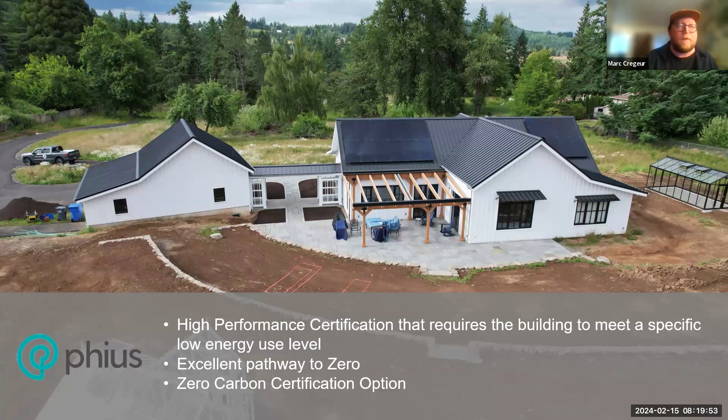So, what's the value? Why do we want to do zero energy or zero energy ready homes? Well, number one is comfort. Sure, can there be an uncomfortable zero energy house out there? Absolutely. You can throw solar panels on anything and make it zero energy. But if you're following the steps that we're going to lay out here pretty soon in this webinar, with good building science practices, it's going to reduce that energy use and make more comfortable buildings for your occupants by following these types of principles that we'll lay out.

Health: this could be the indoor air quality health of your occupants, and health of the environment around us. We start to introduce filtered ventilation. We start taking bad materials, toxins out of the house. We're going to have better indoor air quality, moisture control, definitely a big part of that. And then we also want to look at, what are we doing for the environment around us?

40% of all the US carbon emissions come from buildings. Reducing our energy consumption and fueling it with renewable resources is going to help reduce the effects of climate change. We're moving forward with codes and goals that we want to meet out there. Getting zero energy ready homes is a really great step. Getting zero energy homes is a step that we want to get to eventually.

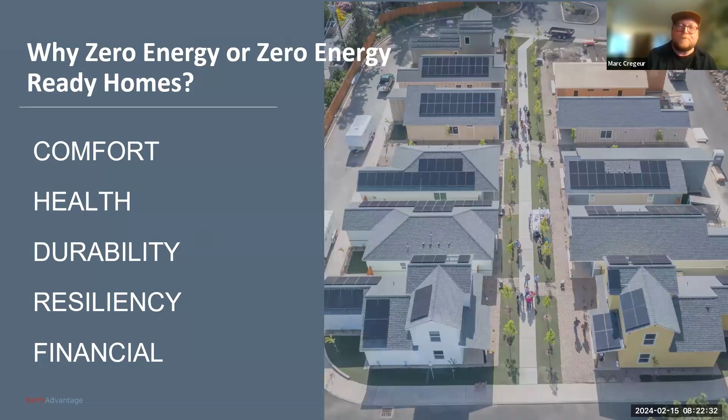And then, financial: we want to protect ourselves from these rising energy costs. It's only getting more and more expensive out there. And so when we go zero energy, we are really protecting ourselves from those rising costs. And all these systems have their simple payback. They will pay for themselves down the road. And as these energy costs rise, that simple payback gets smaller and smaller. So there's a great financial reason to move into these types of homes, with lowering operating costs and protecting on rising energy costs.

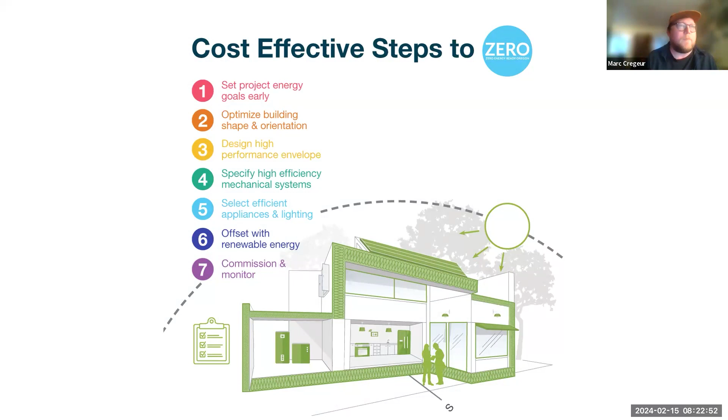So how do we do it? Our friends at the Zero Coalition put together these really great 7 cost-effective steps to zero energy buildings or zero energy ready buildings that we're going to follow and use as a jumping off point for this webinar. And that first step is going to be: set your project energy goals early. Maybe arguably the most important step out there is start doing this at design. Make a decision, get together with your project team, and lay out the goals that you want to have for this particular project. That's going to be a really great way to plan and design and reduce costs and issues down the road with trying to make it happen mid-construction.

Get together with your project team, get together with an energy efficiency consultant, get some energy modeling going, get early design assistance or an IDP, integrated design process, whatever you want to call it. But start doing this early in the design phase, get those goals set, get those people set, and then once we start designing, we're doing that with these goals in mind.

One of the first things we really want to look at is optimizing our building shape and orientation. Low surface to volume ratios and simplified design are going to ease construction costs. It's going to make the house much more energy efficient.

It's going to be a lot cheaper to construct. And that is a really, really great first step. With design, we're looking at those low surface to volume ratios. We want to be looking at how we orientate our house. Obviously, we want that east-west orientation, good southern exposure, great roof lines and pitches, simple designs, so we can really get planned for our solar in the future.

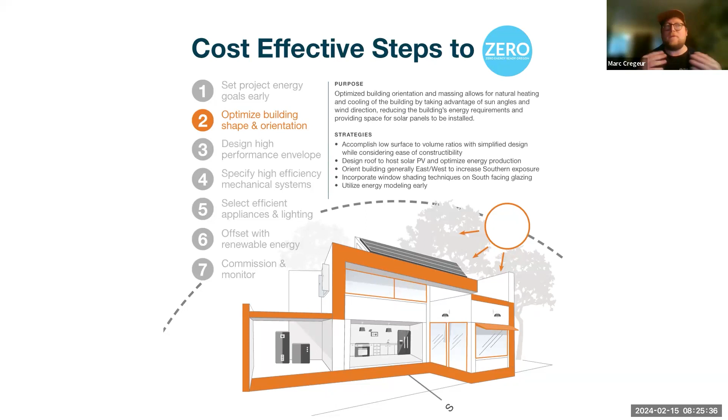cooling loads. We want to look at maybe our solar heat gain coefficients and where we're putting those in certain windows and certain orientations. All these things can be built and thought about in our design phase, making sure that we're getting those into plans, and start utilizing energy modeling as soon as you can while you're designing. Ideally, maybe you have someone on staff that's a WUFI modeler or a certified passive house consultant, and you can start doing it through that. But if you don't, start looking at working with a HERS Rater and Energy Rater right away. Get some energy modeling done as you're designing.

Like, what about this wall system versus that wall system? And we're doing a cost benefit analysis on there. A lot of value engineering going on. What about this mechanical system, ducted versus ductless, or this HSPF versus that HSPF? What if we do this or that? Start working with this value engineering and all your cost benefit analysis of these different things and these different assemblies that might work for your building or for your clients. The earlier you start doing this, the better your decision making will be, and the more money you can save down the road.

Not only that, these HERS raters, they're building science experts. They live, eat, and breathe this stuff every single day. And so when we're talking in the design phase and making these kinds of decisions, we can think about how is this going to affect this other thing in the house? How does this work as a house, as a system? They can bring some of these building science concepts into your practice and into your construction.

If we want to work with any of the certifications we talked about earlier, and those aren't all of them, those are just some of them in our market and some national ones. Maybe there are different ones in your area, wherever you're at. But normally when we're working with certifications or programs or energy ratings, those are going to be shepherded through your HERS rater. So they're going to be able to let you know what all the requirements are right away, get ahead of that, and make sure we're planning for all that and getting it into our plans, so we can execute correctly when we're actually out there constructing.

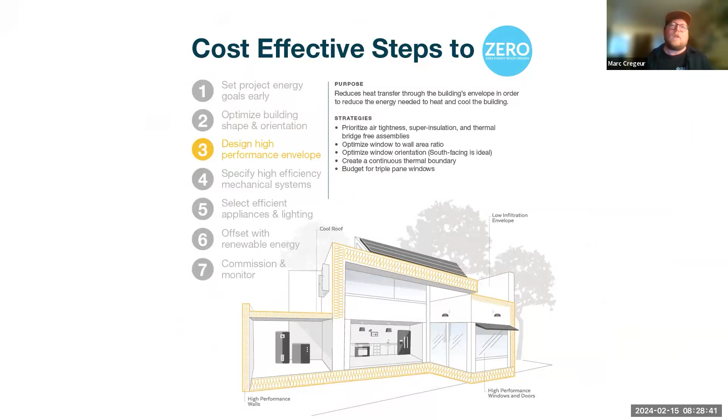All right, next one: design a high performance envelope. Yeah, this is really, really huge. This is the shell of your building. This is the thing that's going to last. So you want to create a really nice high performance shell. And when we're talking about that, we want to talk about our control layers, right? Lstiburek would say something about that, about the perfect wall, and it's absolutely true. We want to talk about our bulk water control layer, keeping all of our bulk water off of our assemblies.

So that's gonna be done through a really nice tightened up WRB. Maybe we have rain screens and then ventilation going there. Maybe we have some extended eaves happening to keep all that rainwater and bulk water off of our assemblies there. Always the number one moisture control, number one important thing in a building.

Next, we're talking about our air barrier. I'm telling you right now, this is going to be the most cost-effective, low-hanging fruit out there to reduce that energy load, reduce that consumption, and create more comfortable buildings. So I highly suggest you look at it and invest in your air sealing and your air barrier techniques. And there's a couple of different ways we can go about this.

Maybe you're still using a primary air barrier strategy where that drywall is going to be your air barrier, and you're going with some air sealing techniques with rattle can foam and caulking and seal, and using a really good checklist, and you can have really good success with that. I have seen that. I have seen very tight houses being done with a rattle can foam and a really good checklist if it's executed really well.

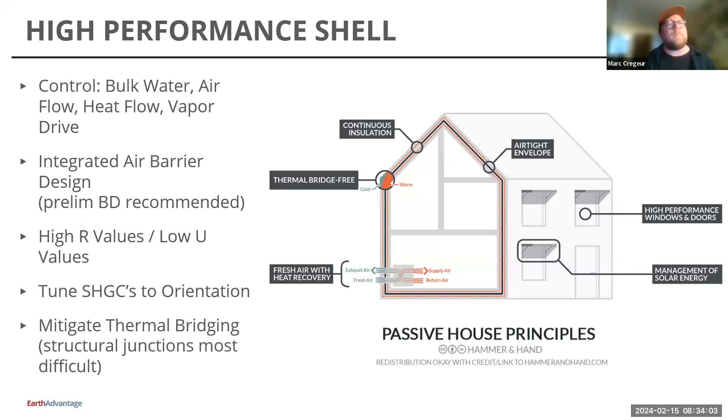Next step is specify high efficiency mechanical systems. Yeah, absolutely. We want to install high efficiency heat pumps. That could be a ducted system, but we want to make sure that we are designing the system and sizing it correctly to that specific house.

You need to go out there, and whether it's your HVAC contractor or maybe you're using a third party designer, here at Earth Advantage, we do third party HVAC design all the time. And we want to make sure that we are designing and doing our Manual J and D calculations for your particular house with your particular envelope specs. So we can make sure we're not oversizing or undersizing, but right sizing this equipment.

And so, yeah, really important, bring them inside, get these things sealed really good, lower that leakage, install them as they were designed. We want to make sure our design flows in our rooms are our actual flows. And then we want to be testing to make sure that happens. So commissioning our systems is a really important part of this process. So make sure we are designing, installing, and then commissioning our systems correctly.

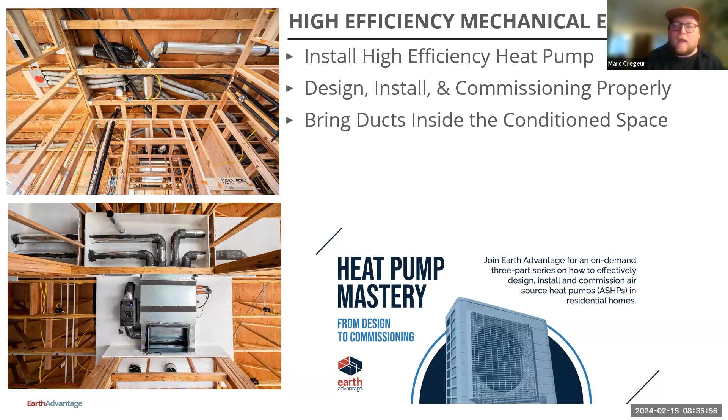Next step is that we want to introduce our balanced ventilation with heat recovery. Balanced ventilation is now code in Oregon. Heat recovery isn't quite there, but I highly suggest that. I know we're looking at some costs here, but there's some different steps that you could do. Maybe your building lends itself to just a spot ERV or something, bringing balanced ventilation in with a little bit of heat recovery in a low cost scenario. Maybe you're building an ADU or a really small building and that works.

Or maybe you take the next step up where you're bringing an HRV in, but maybe you're just doing a couple supplies and a couple returns and lowering the cost of that, but still getting some balanced ventilation and heat recovery in there. Or maybe you're going to the full Cadillac system, a full distribution, getting all our supplies in our bedrooms and our returns and exhausts in our bathrooms or hallways, and doing this full distributed system, which is incredible and great. And I think we're seeing more and more of that.

But what's going to work for your project? Do some energy modeling, do some cost benefit analysis. But I highly suggest we move to heat recovery when we're working with these type of buildings.

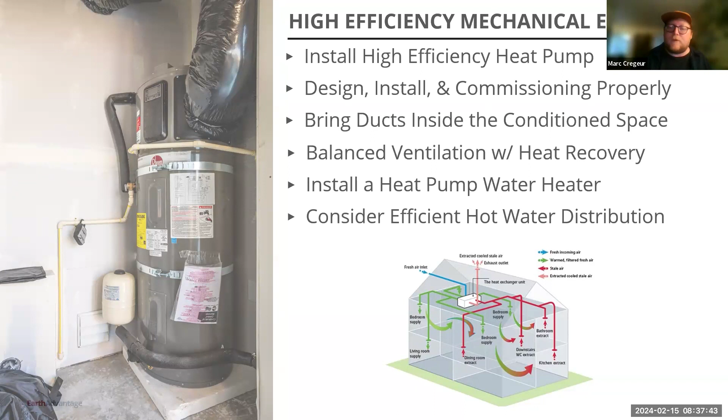Installing a heat pump water heater. These things are incredibly efficient. A regular standard electric tank is going to be 95% efficient. These things are 350% efficient and becoming more cost effective. So look at that product. We want to reduce our loads, and not just reduce the energy use of heating up the water, but we want to consider efficient hot water distribution, which is going to be a requirement in some programs out there, of how we distribute the water around the house. So definitely some things to think about there.

Next, select efficient appliances and lighting, kind of a no-brainer and very simple. LED lighting out there is cheap, it's effective, and it's everywhere. So putting in LED lighting everywhere, but maybe we want to look at daylight lighting modeling, and maybe we don't need as many indoor lights if we have good daylighting. Maybe we want to look at some smart controls, motion sensors, occupancy sensors, dimmer switches or something like that that can be reducing the energy of that building.

Install all of our Energy Star appliances. It's going to be a requirement if you're working in that DOE program, or here Earth Advantage or Energy Star or some of these other programs are requiring all Energy Star appliances. They're everywhere. Make sure we're putting those in. And so those are kind of a no-brainer, really simple step to reduce some energy there.

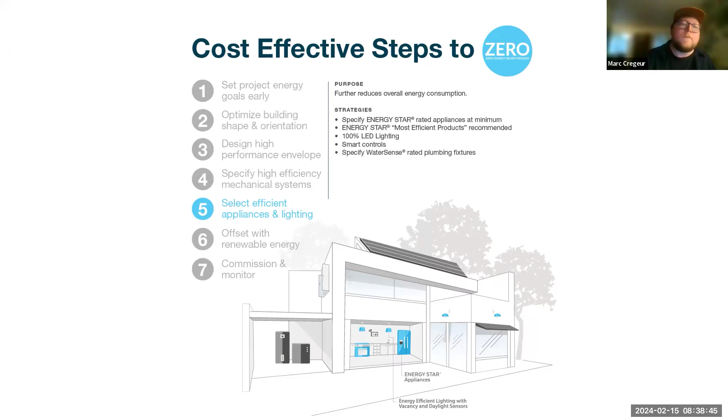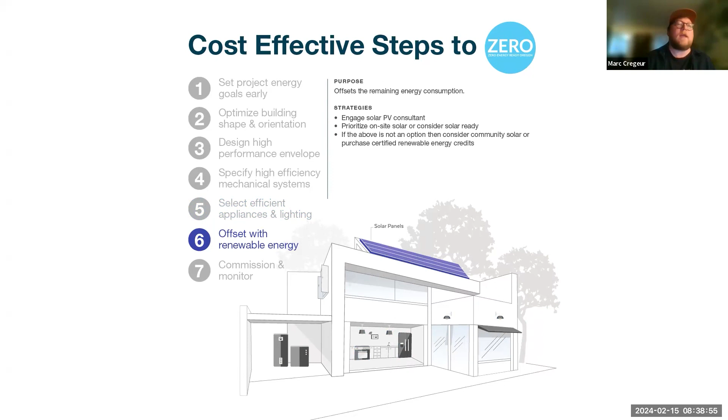And next, when we hit all these steps, we got together a plan and we designed our house nice and we orientated it well, and we built a really nice high performance shell and executed that well, and it's really tight, and we put in high efficiency equipment and it's designed well and it's installed well, and we got our lighting and our appliances, and we got all these pieces of the puzzle built up to put in.

And then we can start looking at a renewable system, right? We want to reduce the consumption of that house, reduce that load so we can put a smaller system on, right? Solar's getting cheaper, but it's still pretty expensive. So the smaller the system, the better. So at the end, we want to reduce that consumption, and then we can size that solar system to that and install that.

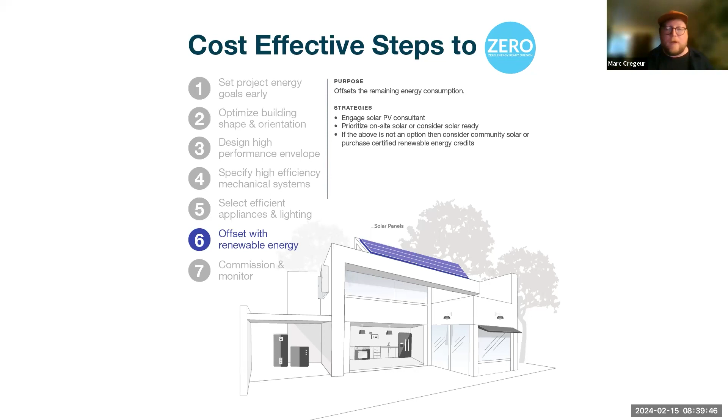So we need to have that space in the breaker, have that ready for future solar. We need to have space on the walls for future inverters. We want to make sure we have a 3/4 inch, or maybe even a 1 inch, depending on the size of your house, non-flexible metal conduit, going from our J box at the wall near that breaker all the way to the J box up at the roof, making sure our future solar contractors have conduit to be able to run their lines down and hook up those inverters.

We want to make sure that obviously we're orientating and creating really good, simple roof designs that allow for solar. But we also want to make sure that we are watching where our penetrations are going through our roof, whether it be roof vents or plumbing penetrations, flues, different things like that, so that we're not putting them into the spot where we want to have solar. So really, really important. I can't stress this enough.

Get it into the plans, put out where those solar panels are going to be and get those into the plans. And if you know where penetrations are going to be, get those into plans. So we're able to execute on site when we're constructing this home, and make sure things are ready out there for future solar, and we're getting these things solar ready.

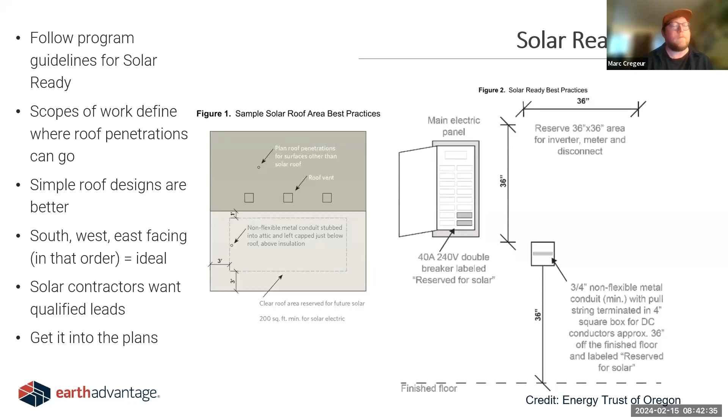And another last step out here is commissioning and monitoring, right? We want to make sure the house is performing the way we designed and constructed it. We want to do blower door tests. We want to test all these ventilation systems, whether it's your whole house ventilation system or your spot ventilation system. You would be surprised how many houses I walk into and none of their bath fans, you can hear them, but they're not sucking anything out.

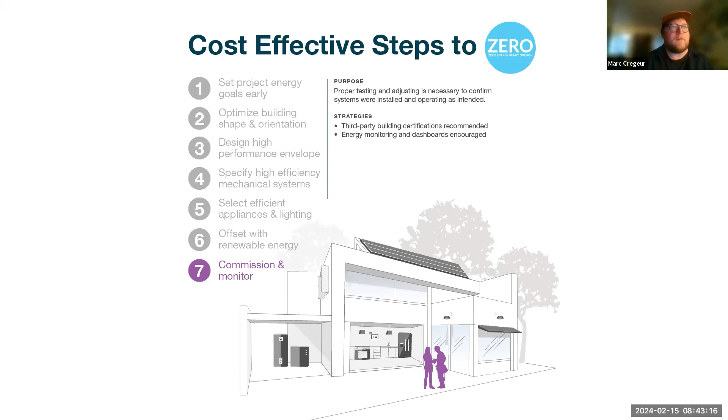This is another value of hiring a third party rater or HERS rater to come out and do commissioning on all these works. Work with these programs out here. Any of these certification programs are great. You're going to have a rater come out there as a third party looking over your building. They're going to be looking over your subs and making sure things are installed the way you want them to be installed, and making sure that they're working the way you want them to work.

Not only is it going to verify and make sure all this is working, but these programs are great sales tools. And some of them have good money attached to them. I'd be remiss if I didn't talk a little bit about, as we mentioned before, this new 45L energy efficient new construction tax credit.

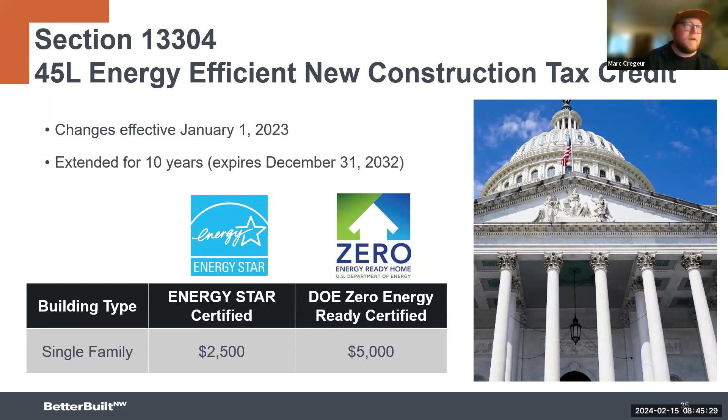On top of that, if you're a builder out here in Oregon and you're not participating in the EPS program, if you're in that Energy Trust of Oregon territory, I think this program is incredible, and the amount of money you can get, up to $4,000 per house, is really, really great. This program and the great people at Energy Trust have done so much in our market here to elevate energy efficiency and get builders to go. And it's one of the most robust incentive programs, I think, in the country.

So if you're in the Energy Trust territory and you're building a zero energy home, maybe you can get up to $4,000, and then we have all these a la carte incentives out there. Solar ready. You make your home EV ready, make your home solar and storage ready. And then on top of that, if you do net zero, that's another $1,000. And if you add any of those tax credit programs on top of that, we're talking about there could be $10,000 to $11,000 per house for building to these program specs and participating in them.

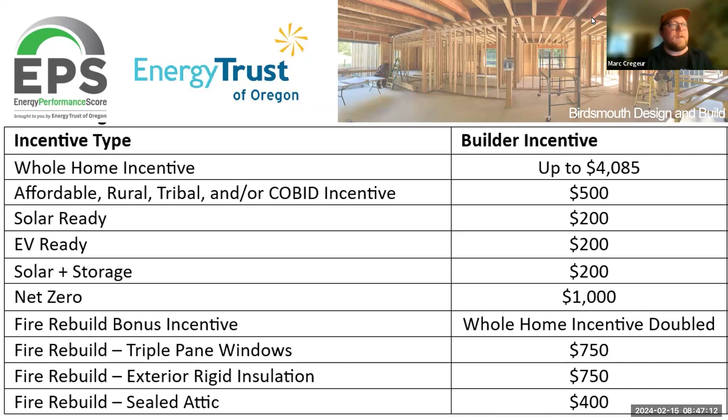It's nothing to ignore, and it's definitely something to keep in mind, and make sure that you are talking to your local rater. If you don't know who that is, let us know. Maybe we can help you, or we can point you in the right direction of someone that's going to be able to help you in your marketplace. But just want to point out there is a lot of help out there to be able to fund and leverage these incentives and get these into your buildings.

So what's the future? I think it's zero energy ready, really.

This is going to be the most cost-effective thing you can do for a builder, and following those steps, reducing that energy use. Efficiency comes first, reducing that consumption and getting these into your everyday building strategies, and getting homeowners set up for future zero energy ready homes, getting your house prepared, lowering that consumption, having those good envelopes, getting the orientation and the roofs right, making these things solar ready, and getting these houses there.

Our codes right now are getting really close as it is. Oregon has a new code update coming up soon. Washington has one. These are becoming more and more challenging codes, and we're getting closer and closer to all these things we're talking about. So get ahead of those a little bit, leverage these incentives that are out there, get paid to do this stuff before Uncle Sam makes you, right?

And so this isn't pie in the sky stupid stuff. You can build really conventional zero energy ready homes following these steps. And I think that's the future. If you build it, they will come. I think people want these types of houses. Obviously, it's not the most important thing for a homeowner making purchasing decisions, but maybe it's something that puts them over the edge. If you're trying to sell your home, that can differentiate yourself from your competition, or give them something more to sell.

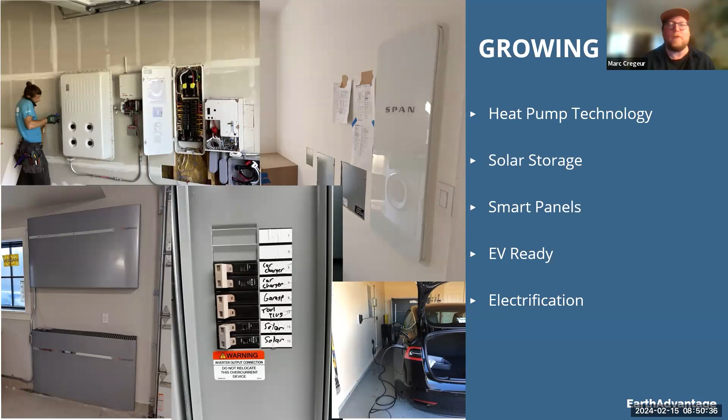So we're seeing a lot of storage, a lot more solar. We're seeing a lot of heat pumps. We're seeing a lot of EV ready. I started seeing smart panels recently, looking at that SPAN. These are all really cool future homes. And so I'd suggest you look at that, and maybe that makes sense for your building.

So let's look at some case studies of houses that have executed and been really successful. One of our builders out here, Ichijo USA, is a production builder, and they are building 100% certified zero energy ready homes. And looking at this, it's a fairly regular show. We've got R38 in the crawl, R29 in the walls. They're using 2x6 intermediate framing, but with a flash and BIB. So they've got 1.5 or maybe 2 inches of closed cell spray foam, and then blowing the rest into the walls. And then putting in R60 blown-in fiberglass attic insulation, and doing some 0.27 code windows.

This is a little bit above code, but not incredibly far above code. They're using a standard drywall air barrier strategy with some rattle can foam and sill sealer, and using our envelope checklist as a way to make sure we're executing and hitting all the right spots. And they're consistently between 2 to 3 ACH. That's a pretty good blower door score. Being very successful with that simple process.

Using high efficiency heat pumps, they moved from gas furnaces to high efficiency heat pumps, bringing the ducts inside the conditioned space. We're doing the design on that and working with their HVAC contractor, who was installing and commissioning them to our specs, following that sequence and getting those mechanical systems done right. Using heat pump water heaters, and doing this in a production sense. This is a very simple, easy, well-designed home that's meeting zero energy ready. And in many cases, putting solar on, we're seeing it all the time, and making them zero energy.

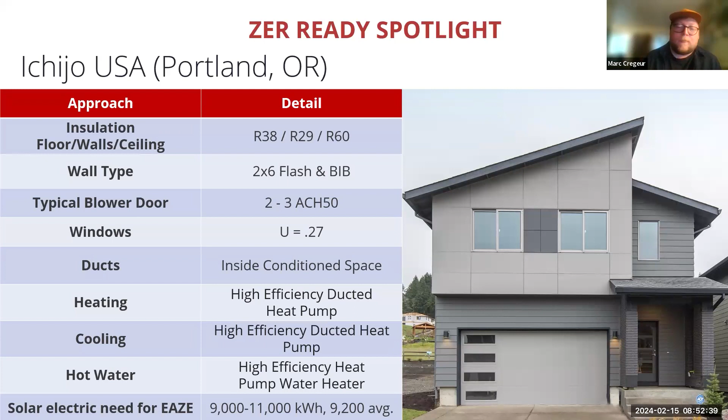Another great example is a client of ours, Noyes Development, which has been doing our Zero Energy Ready program since the beginning of it, I think. Again, a little bit of a different strategy on their wall system. R38 simple batts in a crawl, doing a simple 2x6 with advanced framing, blown-in batt, but using AeroBarrier kind of as their air sealing strategy out there.

Getting an R49 standard blown fiberglass in there. Just a little bit above code, basically code, but just a little bit of a step, not a huge thing. And with that AeroBarrier, they're getting consistently on a production level 1 to 1.5 ACH50. That's a pretty low blower door score, and you're reaping a lot of benefits from that. And so that is a strategy that they chose, and they're doing it on the production scale.

They got a little bit better windows, anywhere from 0.22 to 0.26. Depending on fixed or operable and size, it's all over the place, but we do a weighted area value. So a little bit above code on that, but not much. Very affordable, double pane. They moved to a high efficiency heat pump, doing design, install, commissioning, bringing all their ducts inside conditioned space.

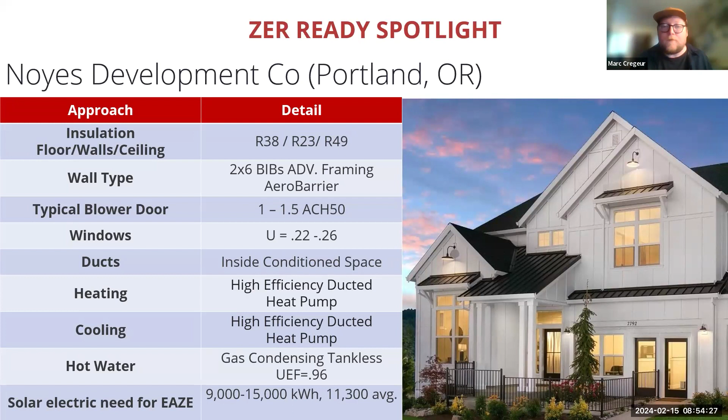But they're still using a gas tankless for their water heating at the moment. And so we've got to go to source energy when we're looking at that, and we want to do zero energy ready, making sure that we're compensating for that small amount of gas that's being used there. But a really, really good example of how to do zero energy ready homes consistently and cost effectively in a production setting.

If we want to look at zero energy homes, we talked about this earlier. Here's the Habitat for Humanity community that they built out there in Bend. Again, a little bit of a different shell out there. Using an R15 slab underneath and on the edge, R26 wall, R60 fiberglass in the attic. Their wall system, again, a little bit different than the last two. It's 2x6 advanced framing, blown-in cellulose. But they decided to do an R5 rigid exterior. So they got an inch of rigid exterior to reduce those thermal bridges. And that's a strategy that really worked for them.

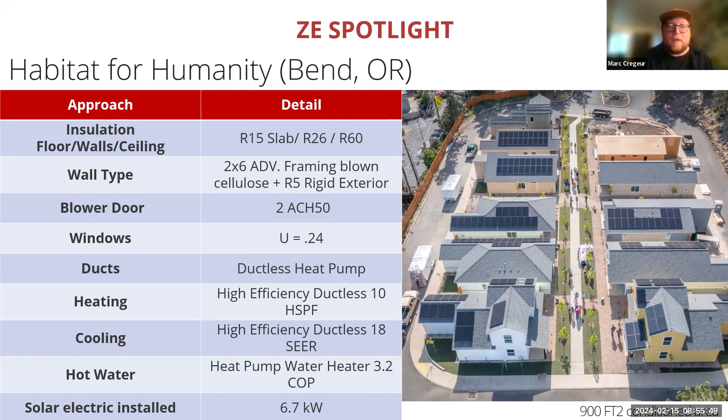We've looked at fairly different strategies for them, and they have chosen to do it in some instances and chose to do something else in different instances. And we used value engineering to do that: a little bit nicer windows, 0.24s, a little bit above code, but nothing crazy. They're going with a high efficiency ductless system, which works for their products quite a bit, and then a heat pump water heater. And they were able to make these buildings zero energy with a 6.7 kilowatt system. So not too bad, pretty small system and a pretty buildable house to make those zero energy.

Another zero energy one is Solaire out there in Bend, our partners out there at Solaire. Again, a different kind of wall system. R38 in the floors, R30 in the walls, R60 in the attic. A little bit above code. They went with a 2x8 staggered stud with a blown-in system, a little bit more robust of a wall system, for sure. That's something they wanted to experiment with. The blower door score is 1.8 ACH50. They went with an exterior air barrier out there, and we're able to test these things early and get those blower door scores really low. That's a really, really nice one.

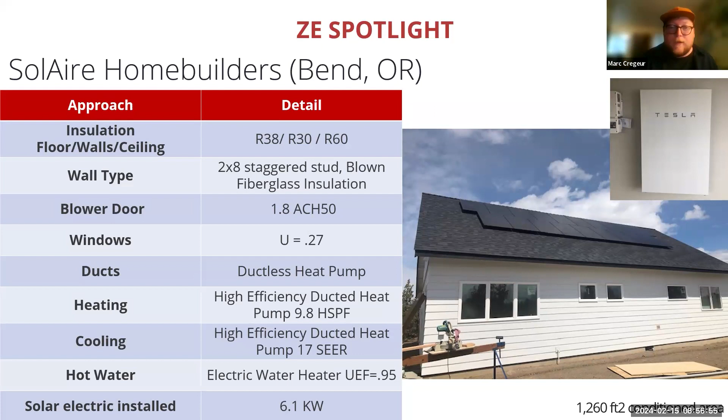Using code windows, again, ductless heat pumps. Interesting about this one, they ended up going with just a standard electric water heater, 95% in there. They had specific reasons why they had to do that, but they were able to meet zero energy with a 6 kilowatt system and this strategy. So another way you can go about it that's fairly simple.

Our friends at Green Hammer, I think last year or 2 years ago, finished out an attached housing product that we talked about, how we were looking at zero energy maybe from a development standpoint, a set of row houses out there. They did a zero energy community that we were able to certify, and they took a different approach, more very high performance. Anyone that knows that contractor, they're a really good high performance builder, and that's how they build.

So their systems out there: they have a conditioned crawl with an R18, a pretty advanced wall system, a 2x8 wall system with blown cellulose and an inch and a half of mineral wool on the exterior, and then an R65 in the lid.

Pretty reasonable, low blower door scores, exterior air barrier, 1.7. That's pretty good, especially when we're talking about row houses. Anyone out there that works in row houses knows how hard it is to get low blower door scores in those types of buildings because of the construction of those party or common walls. Triple pane windows, obviously pretty expensive there, but we're getting 0.14s. You get a lot of gains there.

Using the Minotair system, I don't know if you guys are familiar with that, but it's an air source heat pump and an HRV combined into one system. That's really nice, works really well for these smaller type buildings. Not the most impressive performance in the world, but pretty good, air source heat pump, and bringing those ducts inside that conditioned space and going with a heat pump water heater.

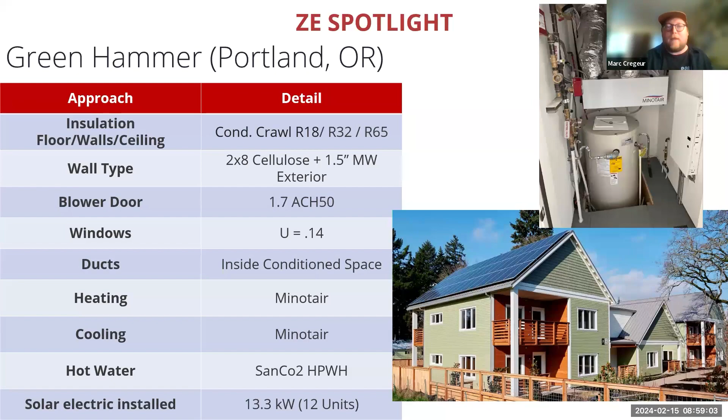But at the end of the day, my colleague Ryan Shanahan, who used to do this webinar before I've done it, had one of our first zero energy ready builders talk to him about a kite versus a rocket, where he wanted to build kites and other people are building rockets. They're both going up in the air. And so a kite maybe is a $100 per square foot house, and a rocket maybe is a $200 per square foot house.

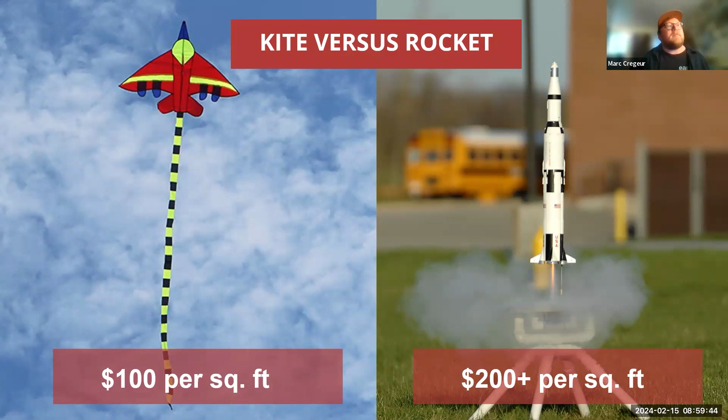Both could be zero energy, depending on which way you want to go and what makes sense for you. And we love rockets. I work on them all the time. And they're really valuable with pulling everyone forward and taking chances and spending a lot of money and finding the right clients that want to experiment with them, in order for people out there to build these kites, these simple, more cost-effective zero energy ready homes and zero energy homes. So whatever avenue works for you, there is a way to build these types of homes.